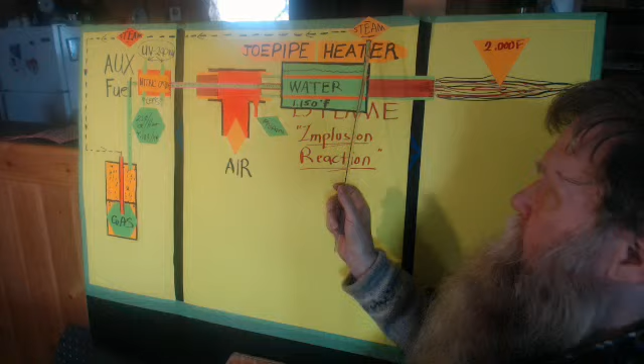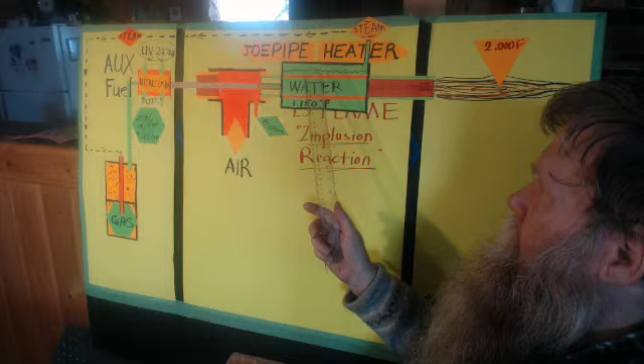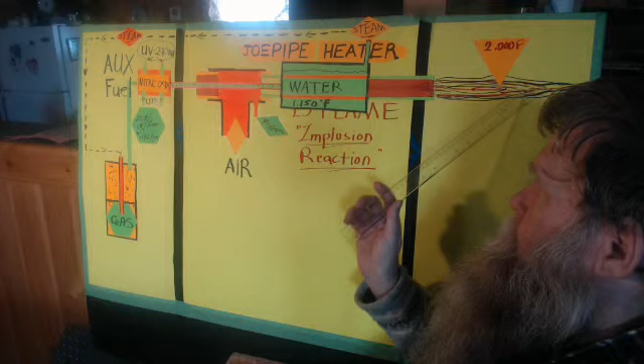So you actually fill this full of water. This is your water line, and you're creating your steam, and it's coming out. 1 pound of water, if I'm using the flame, I've done tests before, I was able to convert it into steam in under 4 minutes. So the flame, I would say, has a little more potential than the heat of the pipe. I'm just guessing about 60% on the flame, 40% on the pipe, or it could be 55, 45, but it's comparable.

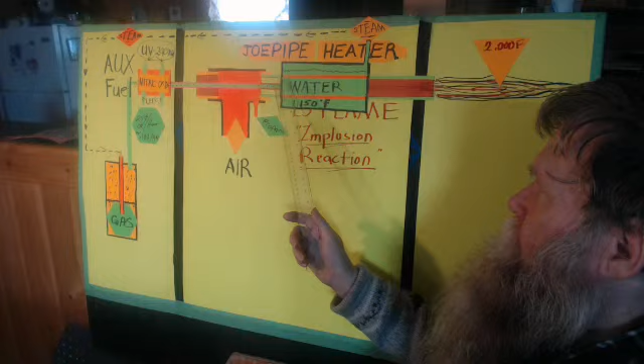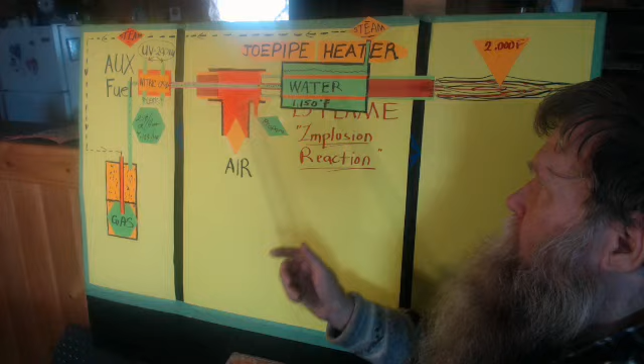But if you've already got a reaction going, this whole pipe, 1.5 by 16-inch steel pipe, like a Schedule 40 pipe, you'd be just red, orange hot. You'd take the flesh off your hands if you touched it. So the outside of the pipe is at least 1150 degrees or more, and the inside of the pipe with flame is around 2200, and the exhaust coming out the end is about 2000 degrees. So you got an extreme amount of heat for very little bit of fuel.

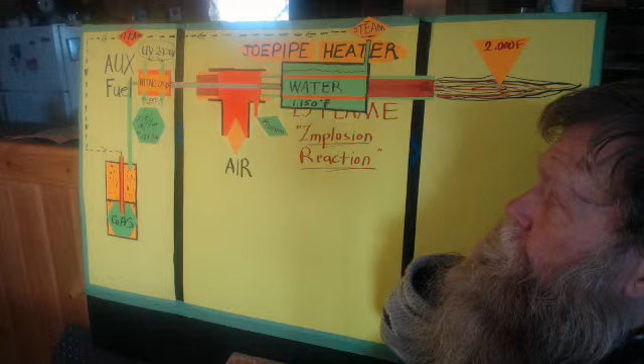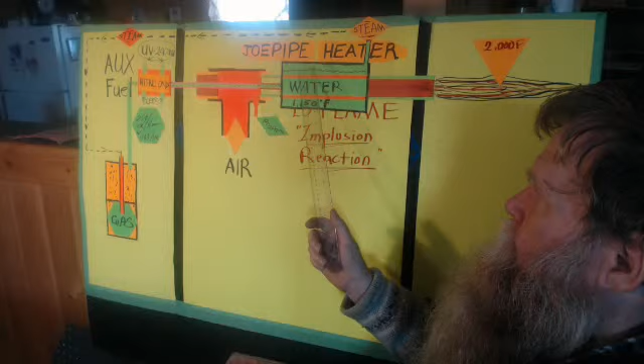This hot water system here, I just want to generate a little bit of steam pressure, or maybe low-level superheated steam, between 3 to 5 pounds at whatever temperature it's going to come out. This steam is going to be fairly hot. If you hold back the pressure, at 5 pounds pressure it could probably heat it up above 300 degrees, 350 degrees, or something like that.

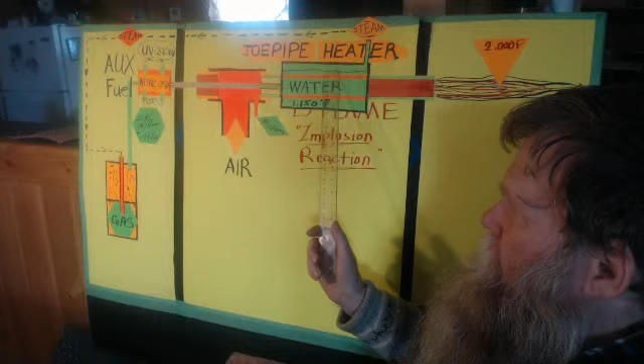So it's going to be low pressure steam, not to the critical state, but enough where I can use the steam as a driver to go into this. This would be a Schedule 40 steel containment, and you got it filled with gas, and your steam is coming in, superheating your gas, where the steam is agitating the gas, and it's coming out, forming a gas and steam distillate, or emulsion mix. I'm not sure.

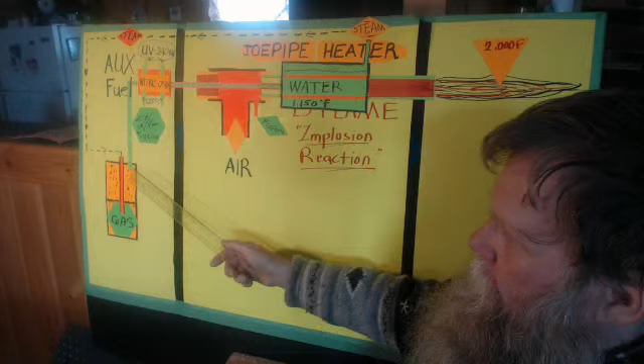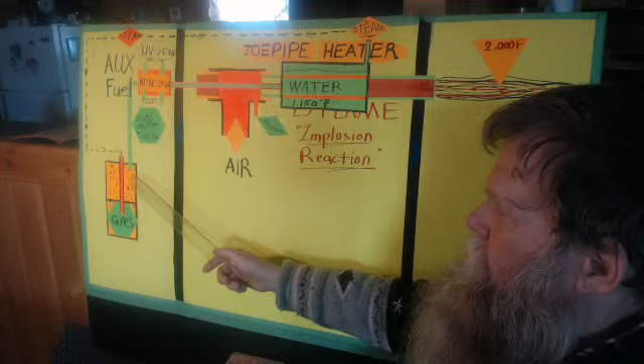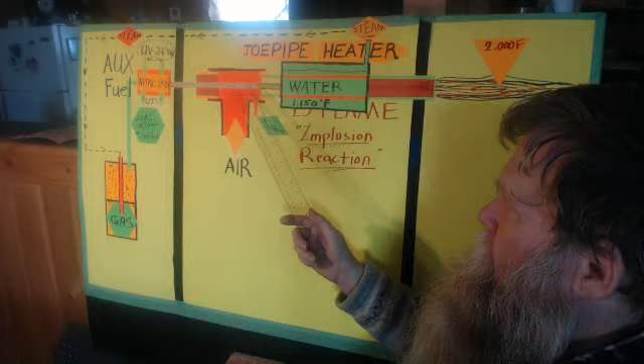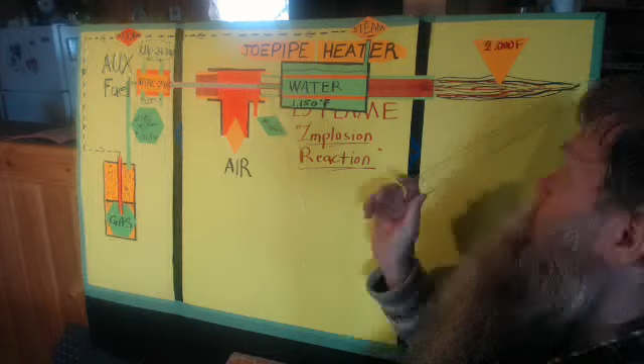So you're actually bringing it here, using this as an auxiliary fuel to replace your propane. I put the propane there, so you start it up on propane to make your steam. You use your steam to make your auxiliary fuel, and you bring your auxiliary fuel in front of the swirl device, because you want to control the reaction of the fuel and air. Once you introduce your auxiliary fuel, you get very bright blue coming out of the end. But as you turn down your propane, it causes the flame produced by the gas and steam to pop back in to form a level 3 reaction. So this is going to be hot, and instead of running on propane, now you're running on your own gas.

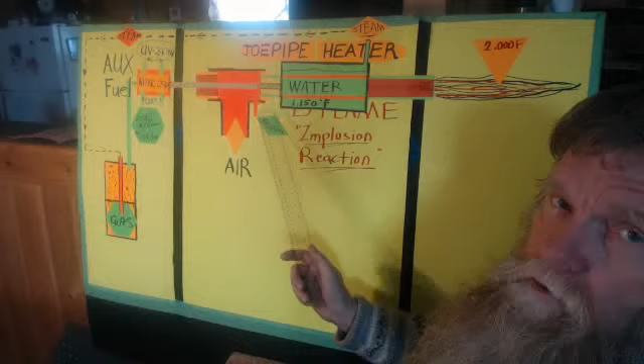Propane on this setup here, you could probably run for about 25 cents an hour. And this will heat up enough hot water, if you make this into a larger plenum, where you could actually heat a house.

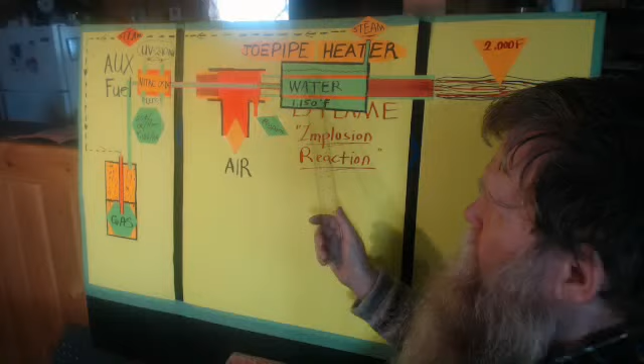So you're just using maybe 2 ounces of propane at about 25 cents an hour, and you're using that to create the steam, to create your auxiliary fuel. You can probably reduce your price from 25 cents an hour to about 10 cents an hour. Now this could be waste oil, it could be anything like that.

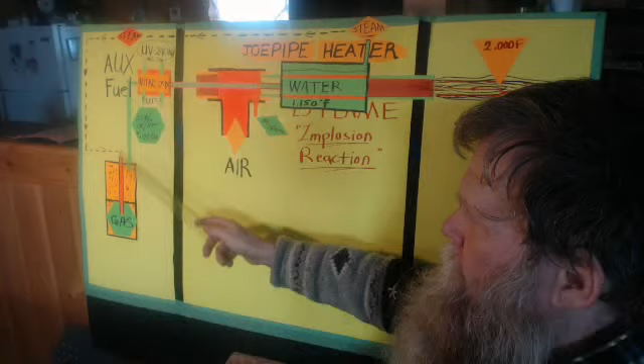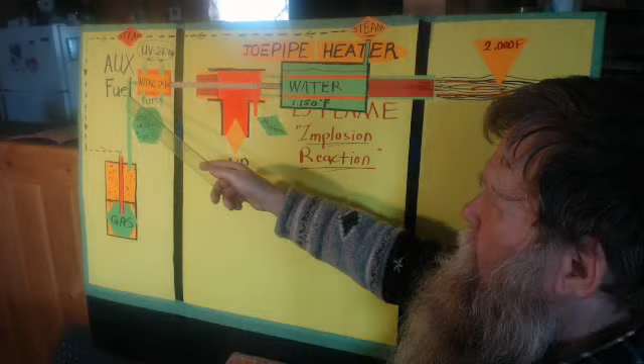So your superheated steam goes through and creates a mixture of steam or water and carbon, so you're creating a hydrocarbon. Steam goes in and you're creating a hydrocarbon coming out, and that's going to replace your propane. So now you're running cheaper, and your efficiency of your hydrocarbon water gas is going to be comparable to your propane, might even be more.

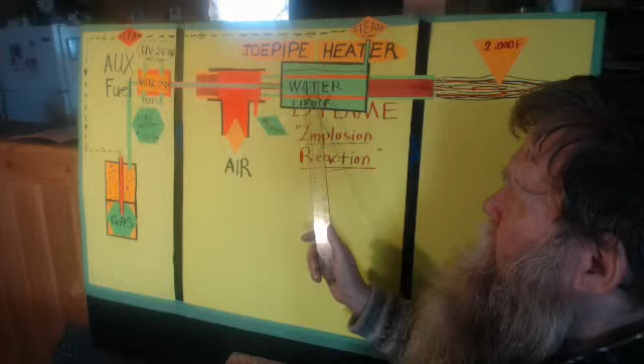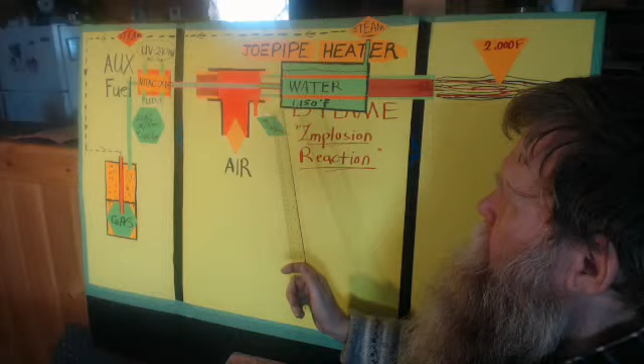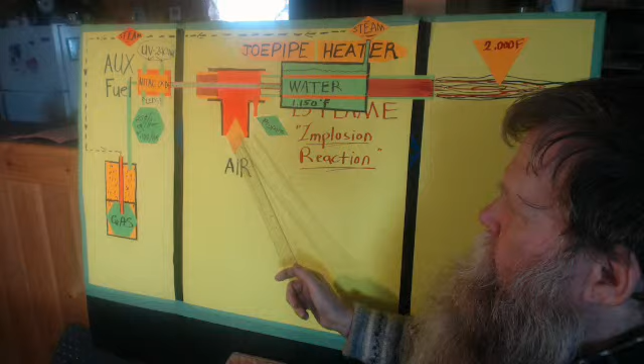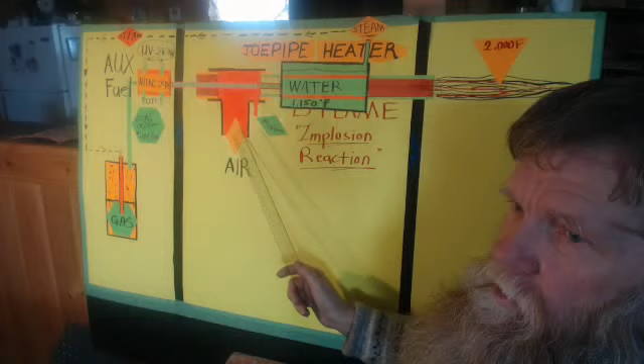nitrogen. You got 80% nitrogen, 14% oxygen in the air that we breathe. So when you add UV at about 240 nanometers as a frequency, it reacts with the nitrogen and oxygen mix to double the weight of the oxygen. So instead of 14% oxygen in your air, you're now doubling it up to about 28% or higher.

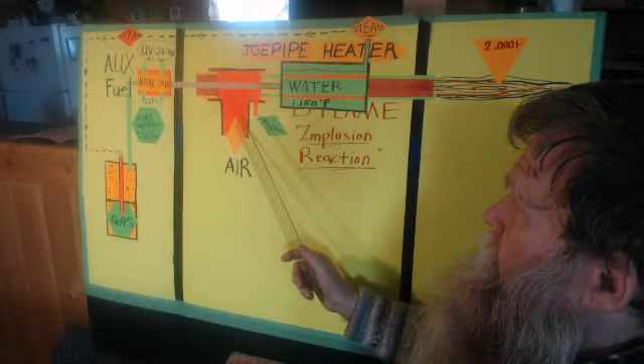So that'd be like adding free oxygen to the system. So increasing the oxygen content in the air may trip the water - you already got an implosion flame, but adding the extra oxygen is going to increase the potential of the implosion reaction to where it might trip it in or condense it into a plasma.

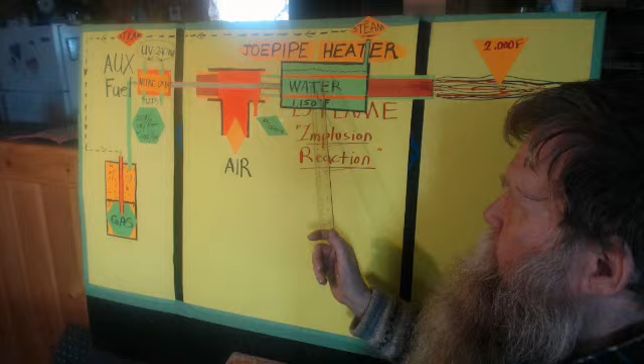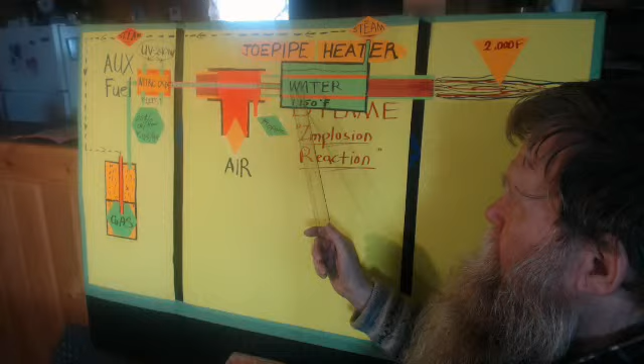Now, I've seen this happen before. I've seen many times where this has happened with Inconel. It's happened with titanium, where I saw when I added extra air or tripped it using maybe extra oxygen, it caused the heat energy of the flame in here to get condensed into electrical, where you're squeezing the flame so tight that it compresses into an electrical arc, and the arc actually shears off the pipe. It's just incredible.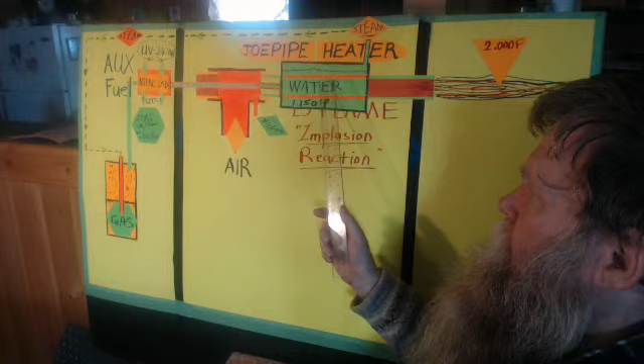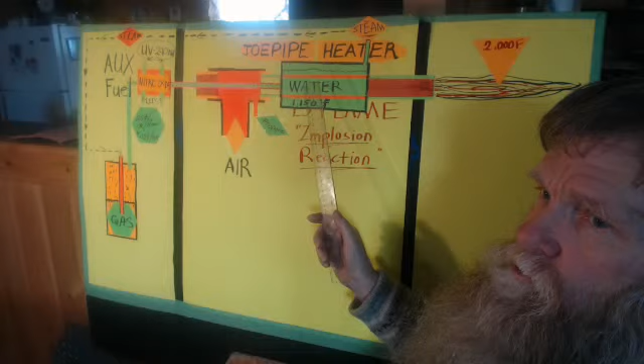But I've seen many manifestations of heat into plasma, not just arcing where it cuts off the pipe. I've seen it where the fire inside condensed into a pinpoint of light. I've seen it where the pipe itself became superconductive, or it went way higher than the physical melting point of the material. I've seen titanium go to maybe 5,000-6,000 degrees without melting, and I've seen copper go superconductive where it melted titanium.

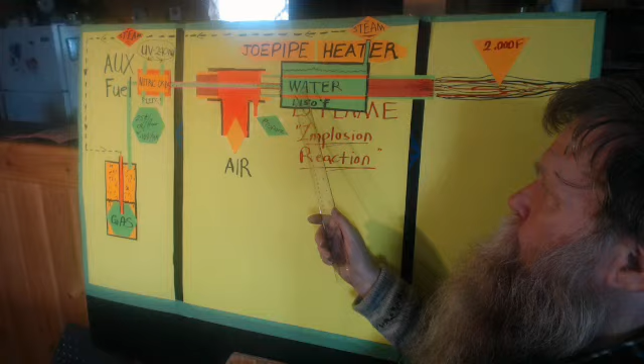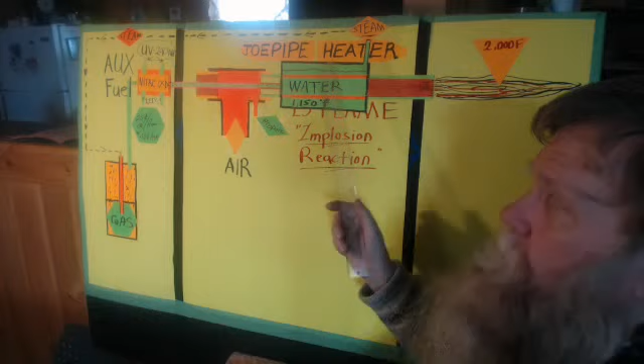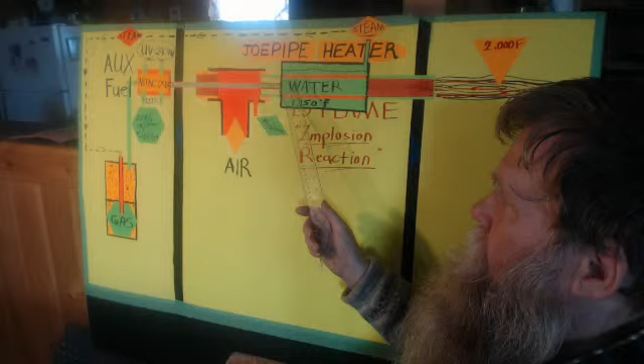So I've seen a lot of things that are not talked about in conventional science. And when it comes to converting matter from the third state into the fourth state, there's really not much out there. And I don't see anyone else on YouTube actually doing experiments anywhere near this classification. Most people are messing around with our third state of matter, but they're not converting matter into the fourth state. And when you do that, the same energy in the third state of matter, when it's converted into the fourth state, it's going to release many times more energy, because you're freeing up the atoms within the fuel or the material.

I think this is all I want to talk about. So I'm kind of setting a premise here about generating your own fuel, and also you can expand on the Joepipe here.

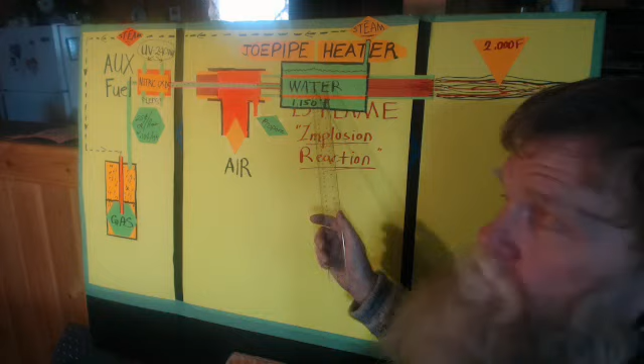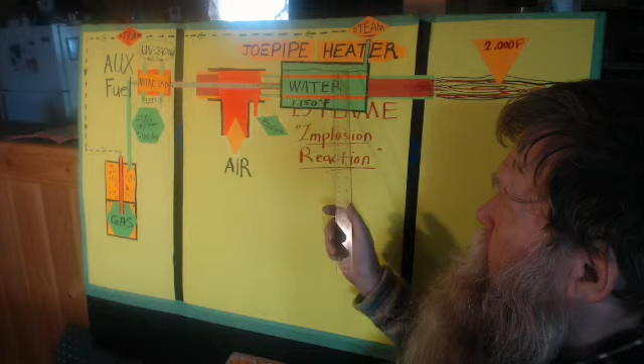This could be, if you use this, could actually be like a 5-gallon pail. So if you took a 5-gallon plastic pail and put this through the base of the pail, and insulated the pail end to help hold the heat, you could keep that 5 gallons of water hot. You could have it connected as a hot water source connected to a truck radiator, like a big large truck radiator out of a Mack truck or something like that, and so you got your water here circulating into your radiator here at the cost of about 2 ounces of propane per hour.

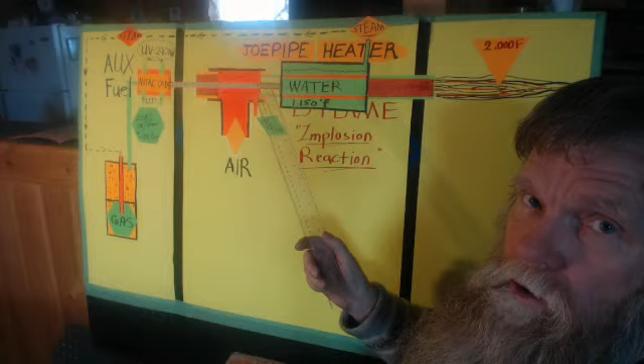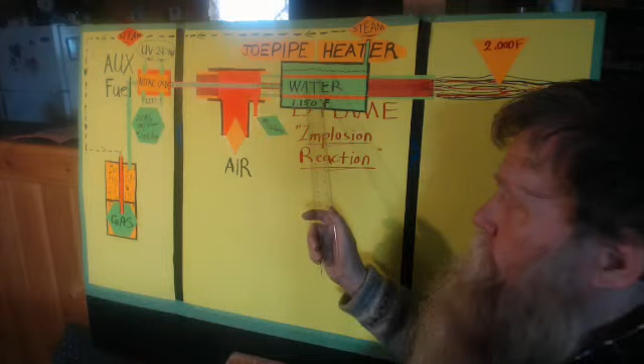And I've seen these systems before, hot water systems that you use where you make a wood boiler and you bring in your 2-inch lines, water lines, to hook to a rad, and I've seen where this was effective to where it was able to heat a home in Ontario in the winter months.

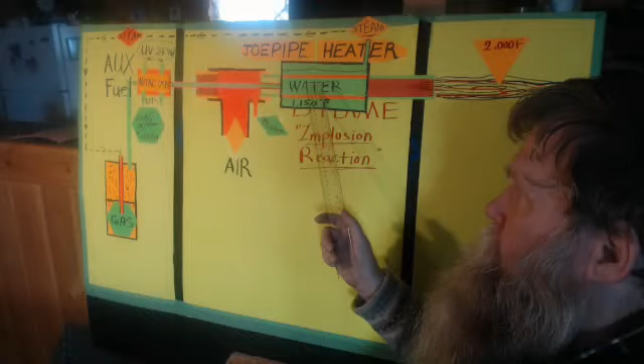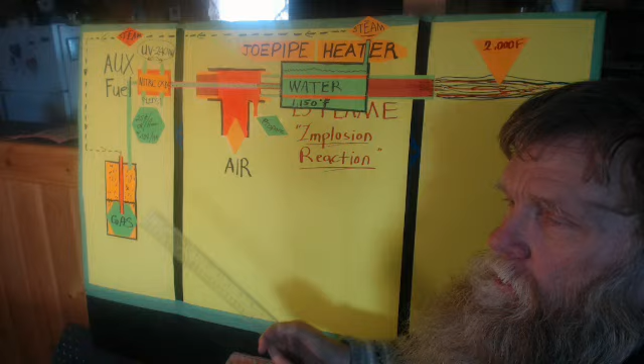And this one home that I was in, that was 1,500 feet per floor, and that truck rad that was inserted into the plenum of the furnace, that had a supply of hot water circulating through it, heated both the main and the upper floors, 3,000 square feet. I'm doing the same thing with 2 ounces of propane per hour.

As far as, if you got your boiler here and you got your radiator here, you don't have to make such a large demand or a volume of hot water. So why not do it? So you can make a portable box system that you could carry, that you could put into any kind of house, and you could have space heating, or you could take that heat and route it into a plenum into your furnace. So if the power goes out, you got a backup system.

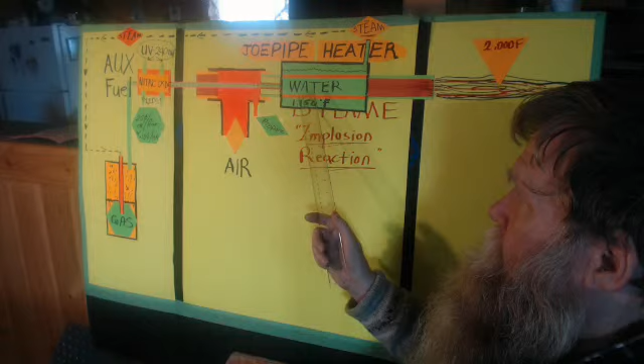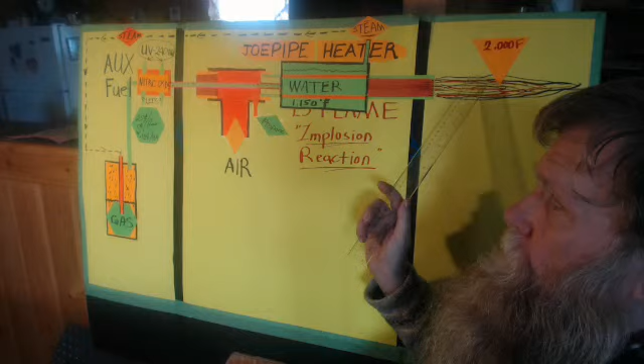And you could actually use this to make a circulating hot water system to a radiator, and also to make personal hot water, everything in the same operation. And at the same time, you're only drawing off 1,000 degrees of the heat of the pipe. You still got 1,000 degrees that's still untapped. So there's a long ways that you can go with this, and especially you guys over in Europe.

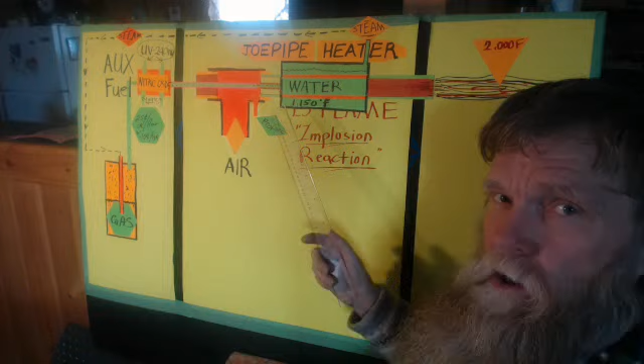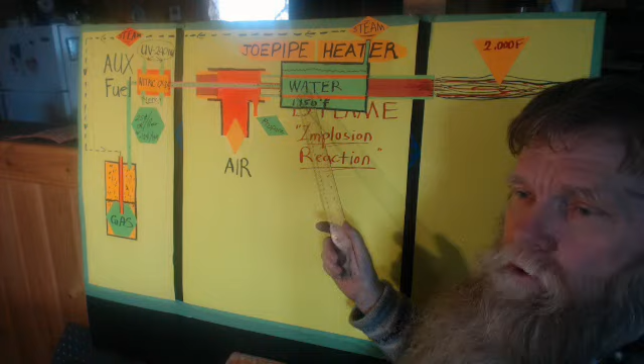I'm hoping that you'll catch on to this, because we're going to see the price of fuel go up, right? There's going to be a stranglehold on the fuel. They're going to try to jack fuel up by 30%, 40%, 50%. Fuel's going to go into hyperinflation. But taking the Joepipe technology and running with it and perfecting it, you have the time to put it to the test and work out the bugs. You're going to have a heating system for space heat and hot water and steam that's going to keep up to any kind of inflationary rise in fuel. It's just a matter of going with this.

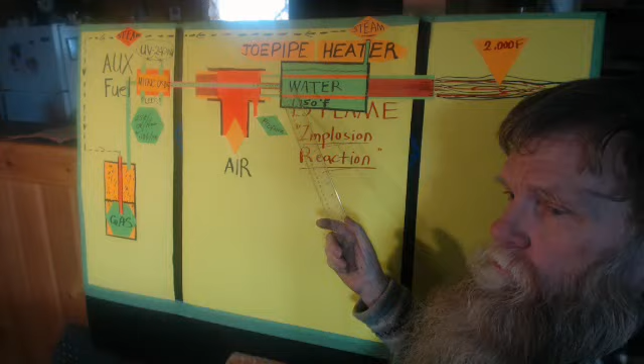I know God has showed me this. 10 years ago, I had a dream. In this dream, I saw a pipe. It wasn't a pipe like this, but it was a small pipe the size of a cigar. And in the pipe, I saw a flame that had special resonant characteristics. And 3 months later, in the summer of 2004 in Nanaimo, I actually came across it. It was just really incredible.

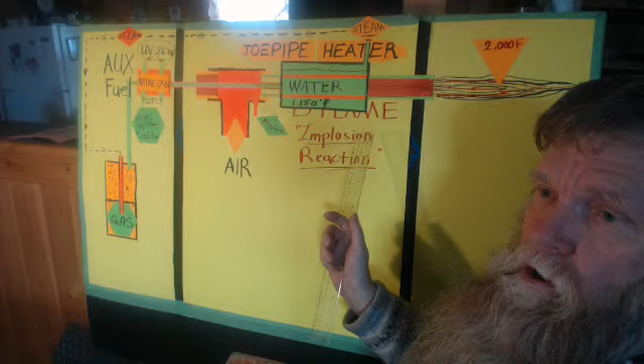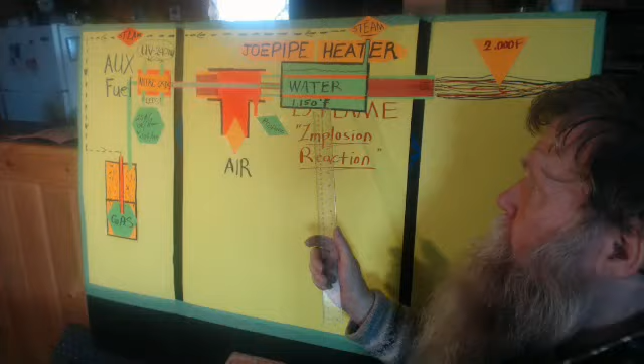Most knowledge that we have inside the box, if you got a box here, represents less than 10%. The majority of knowledge exists outside the box of conventional science. So when you go to university and all that, you're only taught what's inside the box. You're not taught to be a free thinker. You're only taught what other people already know. So that's why we need inventors, because they're free thinkers.

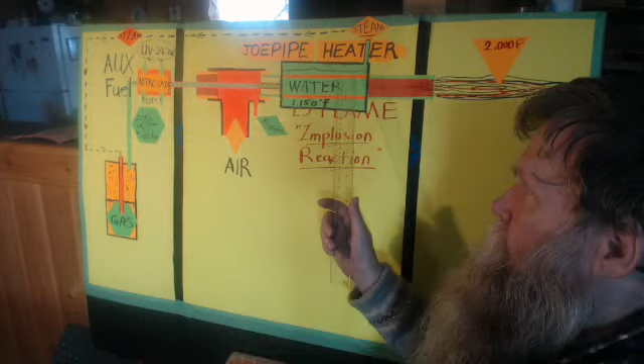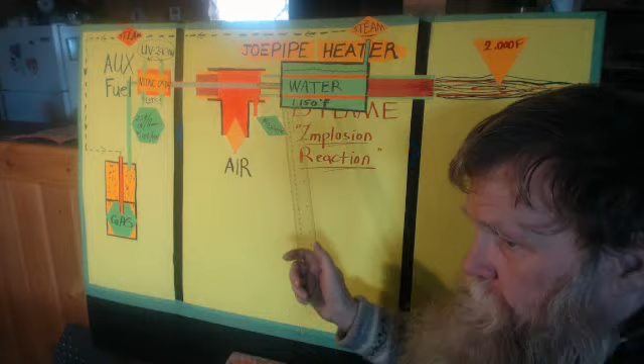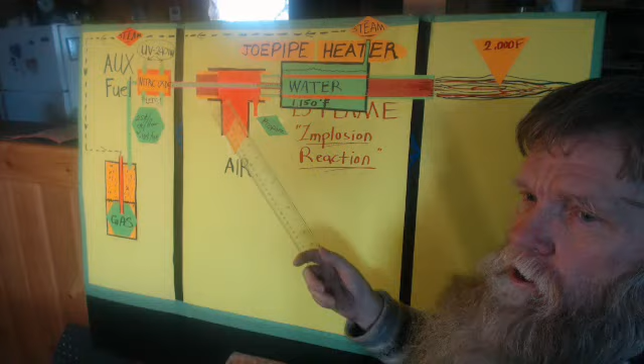People with genuine insight, connection to the Lord, to heavenly realms where you can learn to really create. Because when you create good things, that inspiration is coming from the Holy Spirit. It's not coming from the pit. And we're going to need people like that. God has promised that. God showed Neville Johnson. I've been listening to his tapes. Phenomenal teacher. And recently, the Lord took him to heaven, and He showed him that this is the time that God's going to raise up a Joseph company across the earth, and they're the ones that are going to be responsible for many new technologies that are going to make oil a thing of the past.

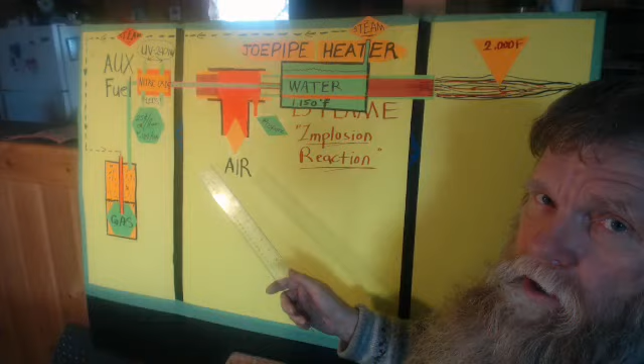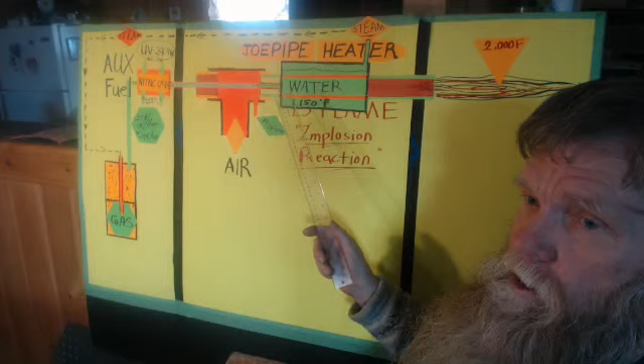If America chooses the right way to back Israel, to not divide Jerusalem, then God's going to bless America and make her the head and not the tail. But if she goes the other way, then we're coming into some hard times. But regardless, the Joseph Company is going to stand to their feet soon, and they're going to have technologies that are going to make it possible for the church to go through the time of tribulation, because I believe that we are going through tribulation.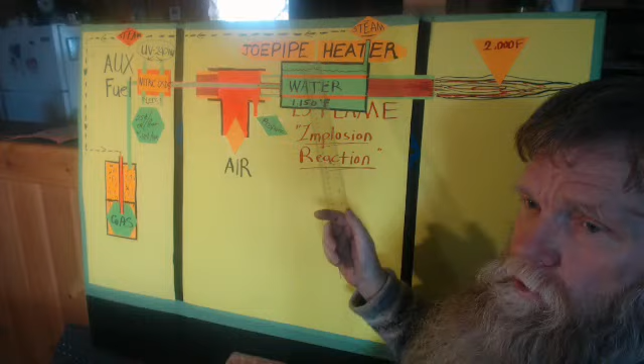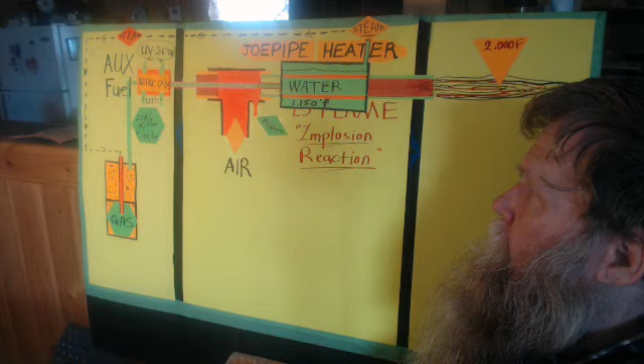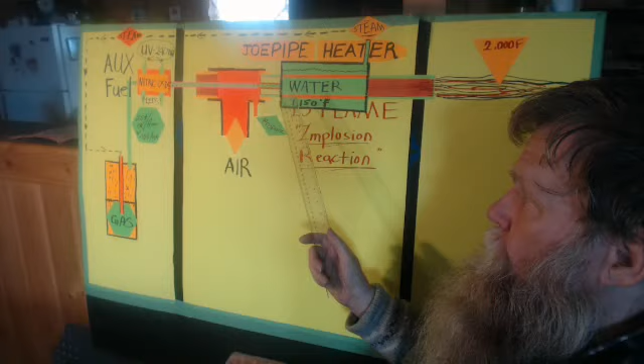The church, their robes are filthy. The Lord cannot take the bride home until first the bride has been perfected and made herself ready, right? And so Scripture teaches fairly clearly that the Lord will not return for His bride until she's without spot and wrinkle. And right now that's not the case. The bride's in the worst possible state right now.